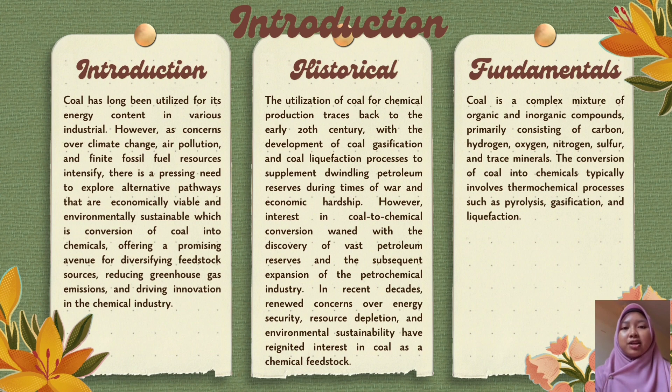Coal is a complex mixture of organic and inorganic compounds, primarily consisting of carbon, hydrogen, oxygen, nitrogen, sulfur, and trace minerals. The conversion of coal into chemicals typically involves thermochemical processes such as pyrolysis, gasification, and liquefaction.

Integrated gasification combined cycle (IGCC) systems and novel catalysts have been developed to improve the selectivity, yield, and energy efficiency of coal conversion processes, enabling the production of a wide range of chemical products including fuels, fertilizers, polymers, and specialty chemicals. The challenges are process stability and product quality, requiring robust pre-treatment and purification steps.

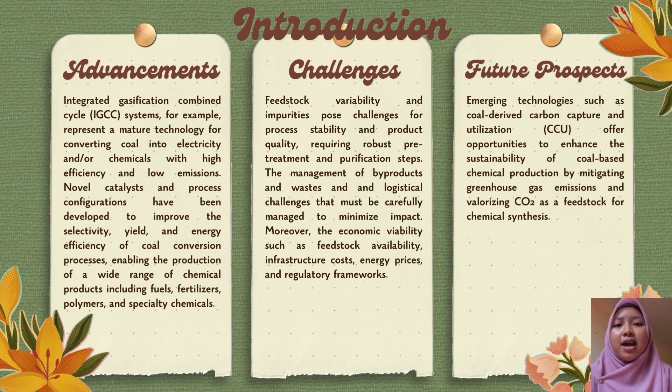The management of byproducts and waste, and logistical costs, must be carefully managed to minimize impact. Emerging technologies such as coal-derived carbon capture and utilization offer opportunities to enhance the sustainability of coal-based chemical production by mitigating greenhouse gas emissions and valorizing carbon dioxide as a feedstock for chemical synthesis.

Now, the history of the production of chemicals from coal. In the 19th century, it involved the distillation of coal tar, which yielded a variety of chemicals including benzene, toluene, xylene, and naphthalene. In the early 20th century, the development of the Haber-Bosch process allowed for the large-scale production of synthetic ammonia from coal-derived hydrogen and atmospheric nitrogen.

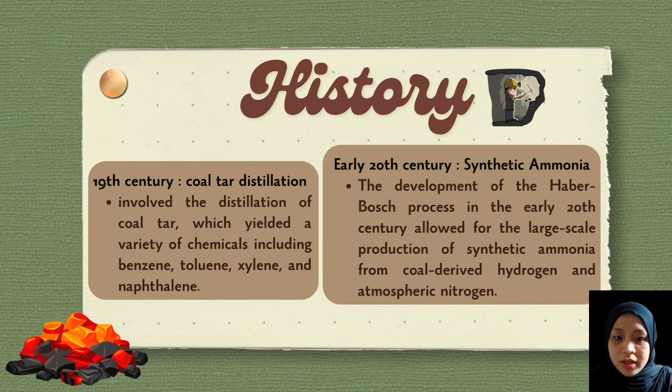In the mid-20th century came coal gasification, allowing coal to be converted into synthesis gas or coal syngas, which is a mixture of hydrogen and carbon monoxide. This syngas serves as a feedstock for producing a wide range of chemicals including methanol, ammonia, and synthetic fuels.

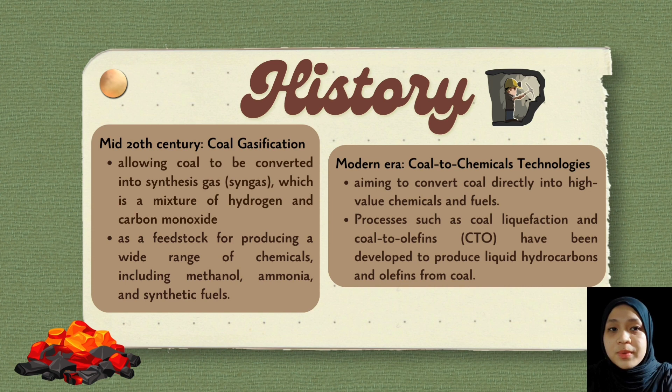Lastly, the modern era, which is coal-to-chemical technologies, aiming to convert coal directly into high-value chemicals and fuels. These processes, such as coal liquefaction and coal-to-olefins or CTO, have been developed to produce liquid hydrocarbons and olefins from coal.

The chemical composition varies depending on degree of coalification, geological origin, and depositional environment. It contains carbon, hydrogen, oxygen, nitrogen, and sulfur. The composition of coal influences its suitability for different conversion processes and the products.

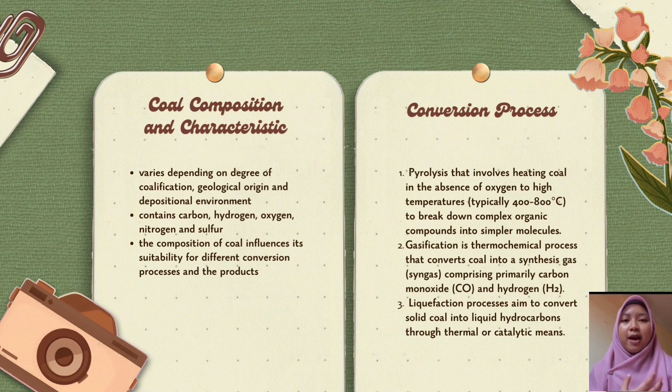The conversion process involves pyrolysis, heating coal in the absence of oxygen to high temperatures; gasification, which converts coal into a synthesis gas comprising primarily carbon monoxide and hydrogen gas; and last, liquefaction processes that aim to convert solid coal into liquid hydrocarbons through thermal or catalytic means.

Next, separation based on their physical and chemical properties, such as distillation, solvent extraction, and membrane separation. Purification by removing impurities and contaminants to meet quality standards and regulatory requirements, such as desulfurization, denitrification, and demineralization. And chemical transformations such as hydrogenation, oxidation, and hydrocracking to enhance product yield, selectivity, and performance.

So let's move on. Catalysts facilitate desired reactions, improving reaction rates and enhancing product selectivity and quality. Supported metal catalysts comprise metal nanoparticles dispersed on high surface area supports, while hydroprocessing catalysts contain active metals such as cobalt, iron, and nickel supported on porous materials.

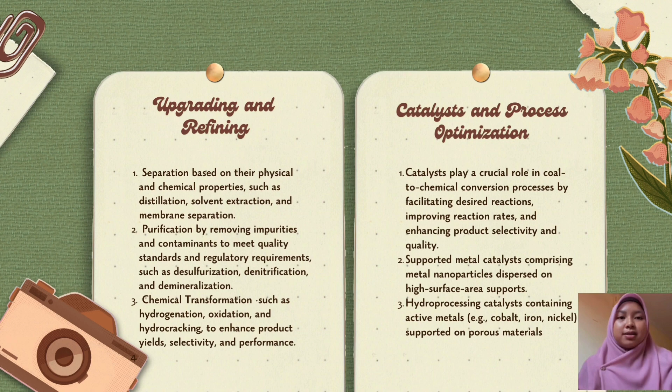For environmental considerations, to minimize its impact, we utilize carbon capture and storage (CCS), and minimize energy consumption, resource utilization, and waste generation. We implement emission control technologies such as filters and catalytic converters, and recycle and treat waste streams.

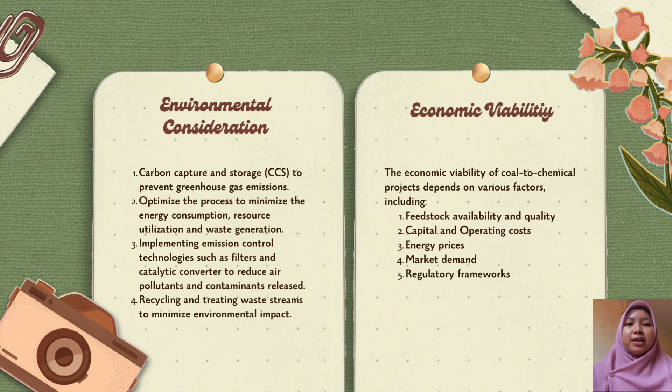Lastly, the economic viability of coal-to-chemical projects depends on various factors, including feedstock availability and quality, capital and operating costs, energy prices, market demand, and regulatory frameworks.

Okay, so next I will be talking a bit about some definitions of the process. Coal gasification and liquefaction are methods to make useful chemicals from coal. Gasification turns coal into a gas mix, mainly hydrogen and carbon monoxide, used to produce synthetic natural gas.

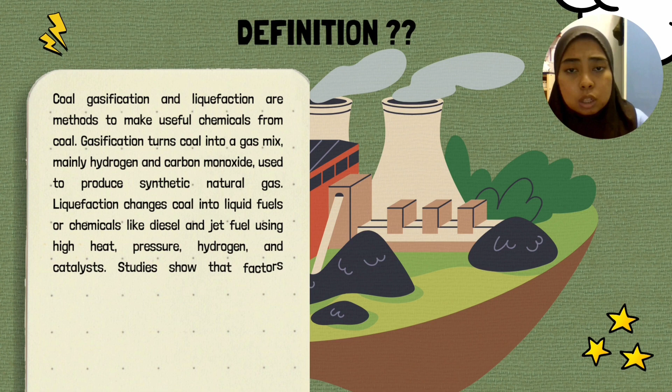Liquefaction changes coal into liquid fuels or chemicals like diesel and jet fuel using high heat, pressure, hydrogen, and catalysts. Some studies show that factors affecting liquefaction also affect gasification, so they are linked together. These techniques, along with coal-to-chemical processes, are important for using coal well, diversifying energy, and making chemicals for industry.

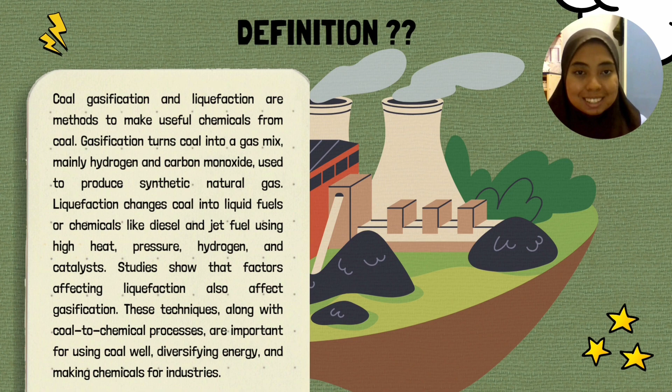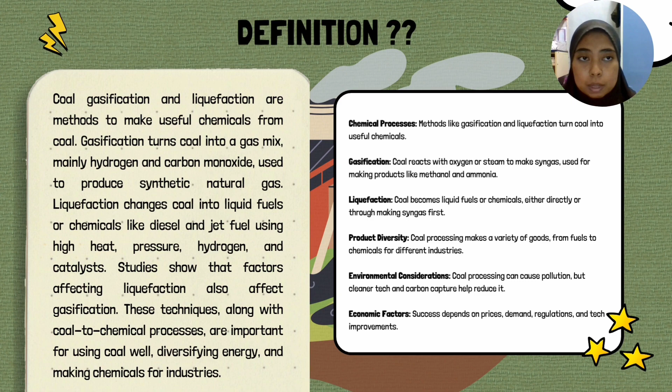Next, some key factors in this process, such as chemical processes: various methods are used to turn coal into chemicals, like gasification, liquefaction, and pyrolysis. Next, gasification. In gasification, coal reacts with oxygen or steam at high temperatures to create syngas, which contains carbon monoxide and hydrogen, used to make things like methanol and ammonia.

Then liquefaction turns coal into liquid fuels or petrochemicals. Direct liquefaction involves reacting coal with hydrogen, while indirect liquefaction first turns coal into syngas, then into liquids. For product diversity, coal processing can produce a wide range of products, from fuels to chemicals used in many industries, offering flexibility based on market demand.

For the environmental considerations, coal processing has benefits but also environmental challenges like greenhouse gas emissions and air pollutants. Cleaner technologies and carbon capture help address these issues. For the economic factors, the success of coal processing depends on coal and energy prices, market demand, and regulations, alongside technological advancement and project scale.

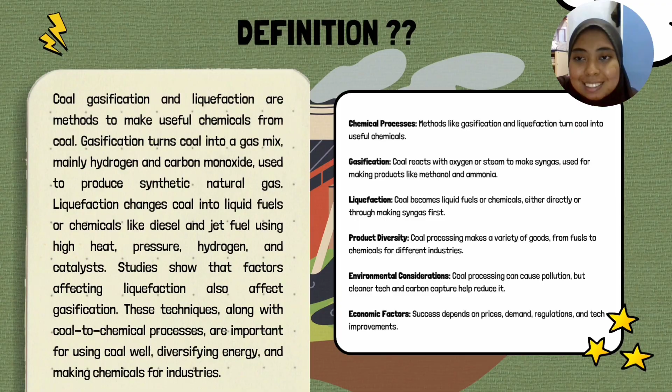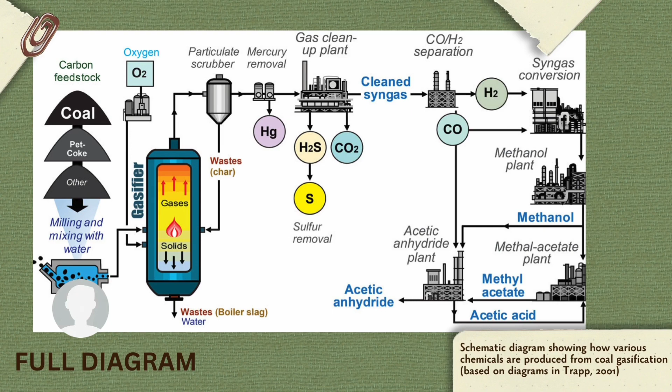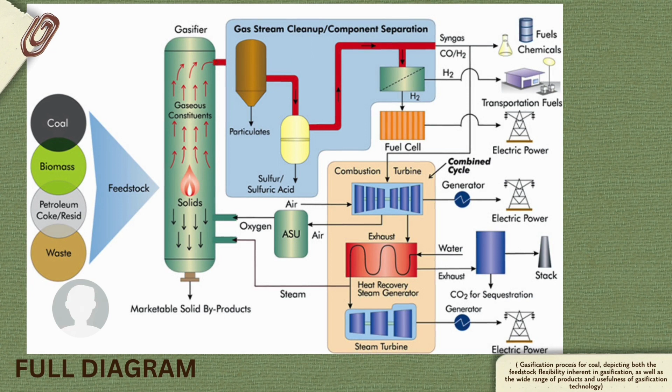Next, the full diagram. This is a schematic diagram showing how various chemicals are produced from coal gasification, based on diagrams in Trapp 2001. Here is another diagram that shows the gasification process for coal, depicting both the feedstock flexibility inherent in gasification as well as the wide range of products and usefulness of gasification technology.

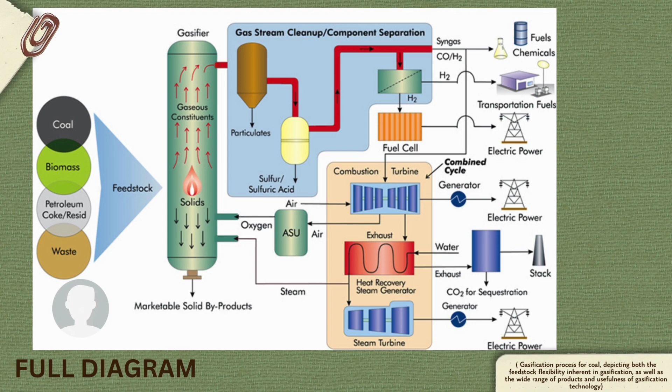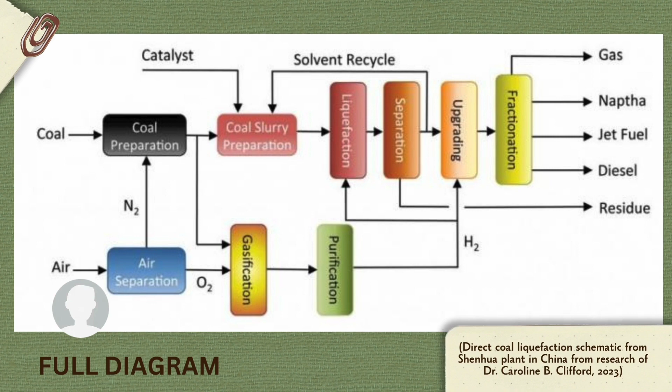And another diagram that shows direct coal liquefaction, a schematic from the Shenhua plant in China, from research by Dr. Caroline B. Clifford in 2023. Continuing, I will explain a simple breakdown of the full diagram and process: coal can be turned into useful chemicals through gasification or liquefaction.

For coal gasification, coal reacts with oxygen and steam at high temperatures to make a gas mix called syngas, mainly hydrogen and carbon monoxide. Syngas can be used directly as fuel or refined into other products like synthetic natural gas (SNG) for heating or transport. For coal liquefaction, the coal is heated and pressurized with hydrogen and catalysts to make liquid fuels or chemicals.

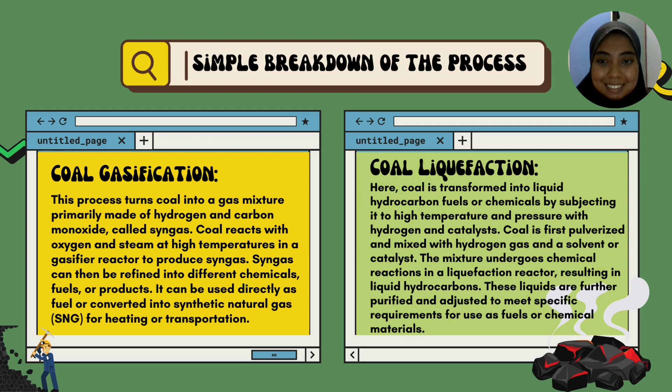Both processes aim to make coal more versatile by turning it into gases or liquids for fuels or chemicals. They need advanced engineering to work well and minimize harm to the environment. Now, the final products of chemical production from coal. Firstly, there are synthetic fuels. Coal can be converted into synthetic fuels such as gasoline, diesel, and jet fuel through processes like coal liquefaction and Fischer-Tropsch synthesis.

Next, chemical intermediates. First, there is methanol, which is used in the production of formaldehyde, acetic acid, and as a fuel additive. Second, there is ammonia, which is essential for fertilizer production and as a precursor to various nitrogen-containing chemicals. Third, there are olefins, ethylene and propylene, key building blocks for plastics, synthetic fibers, and other polymers. And lastly, there are aromatic hydrocarbons: benzene, toluene, and xylene, used in the manufacture of plastics, dyes, and pharmaceuticals.

In conclusion, coal has a long history of being used to make materials and chemicals. It started the Industrial Revolution and has since been essential to many other sectors, including organic chemistry, steel manufacture, and energy generation. The transformation of coal into gas and liquid fuels and its use in the synthesis of syngas and ammonia had a profound effect on the development of technology and the world's economy.